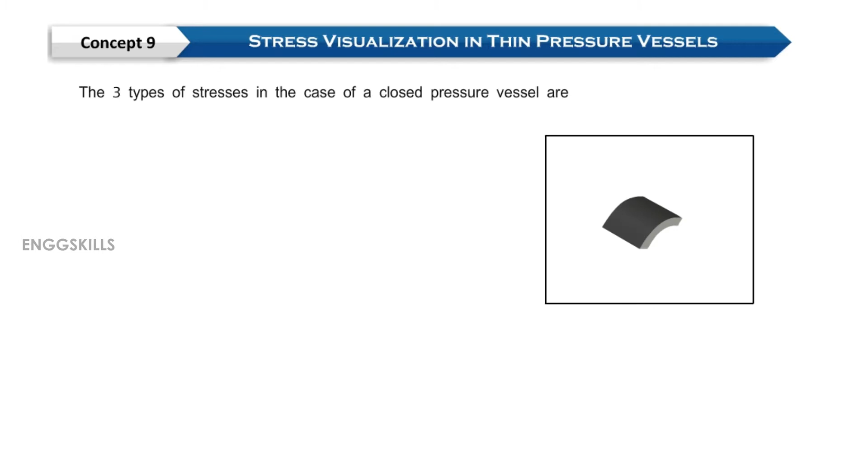The three types of stresses in the case of a closed pressure vessel are longitudinal or axial stress, hoop or tangential or circumferential stress, and radial stress.

Out of these three stresses, for a pressure vessel, radial stress is considered negligible as it is a plane stress condition.

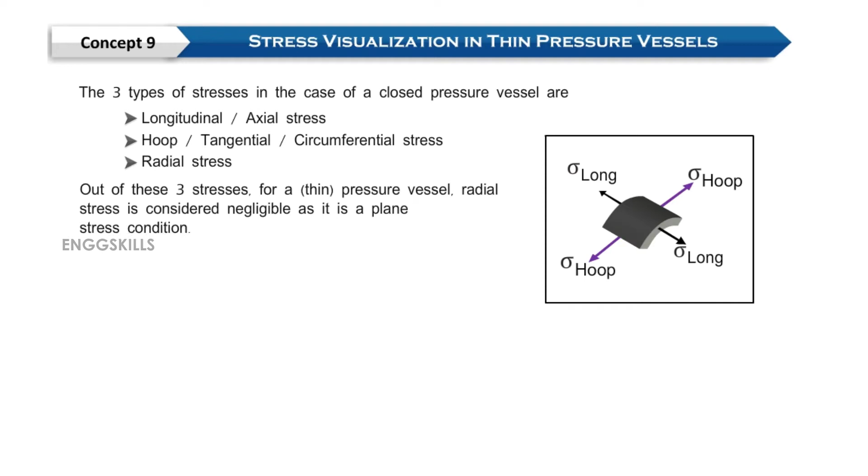Making a general comparison for thin pressure vessels between loads in hoop and longitudinal directions, hoop load is greater than the longitudinal load.

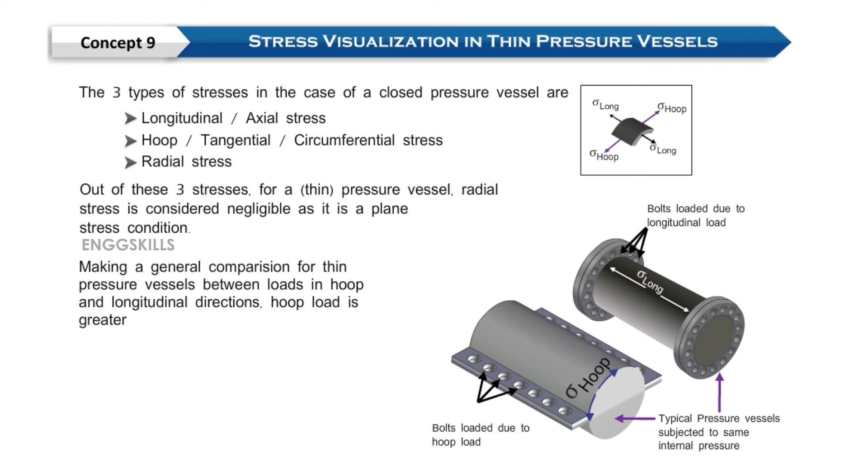Let us now derive an expression for longitudinal stress. We know that stress equals force by area, and force equals pressure into area.

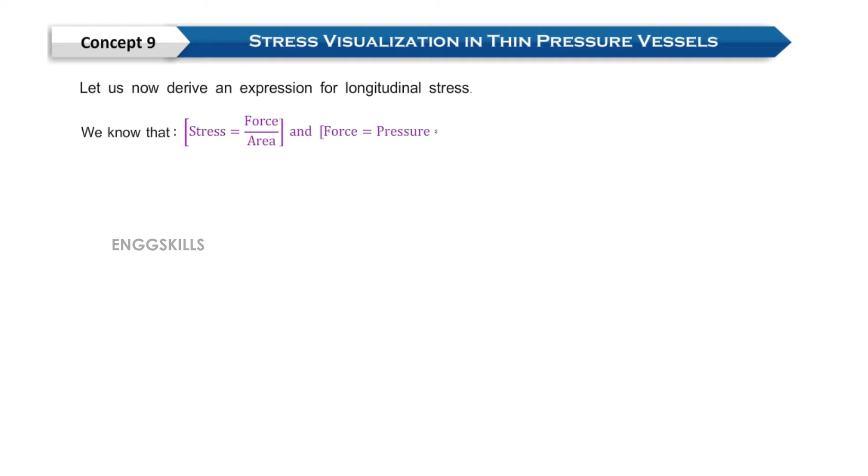The force that causes longitudinal stress is the force that acts on the end lids or plates of a cylinder.

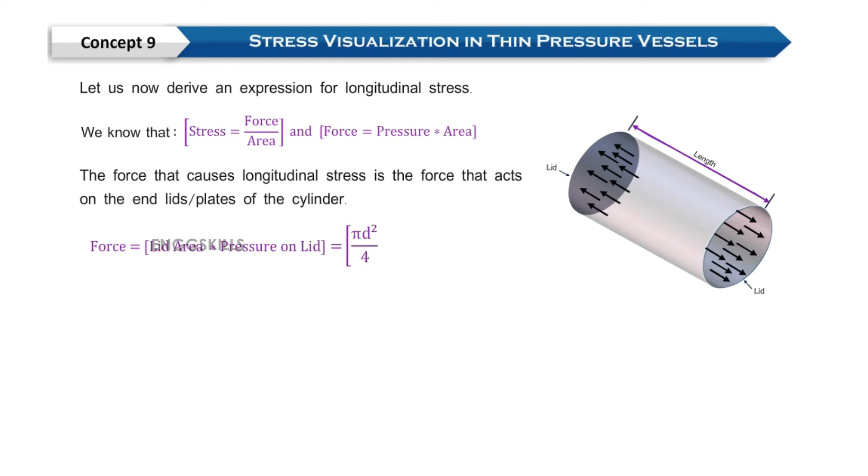Hence, force equals lid area into pressure on the lid, which is pi d square by 4 into P. The figure shows internal pressure in the longitudinal direction.

The material cross-section of the pressure vessel that withstands longitudinal stress is given by pi dt.

Longitudinal stress equals force by area, which equals pi d square by 4 into P, divided by pi dt. This equals Pd by 4t, which is Pr by 2t.

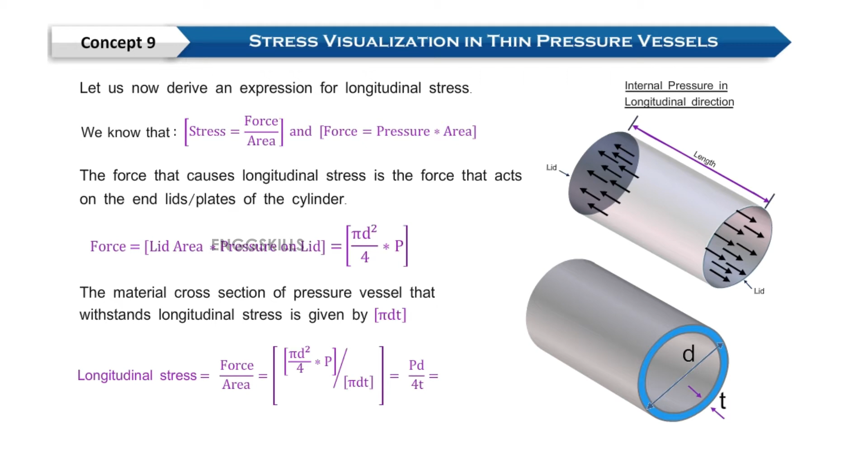Let's now explain hoop stress in detail.

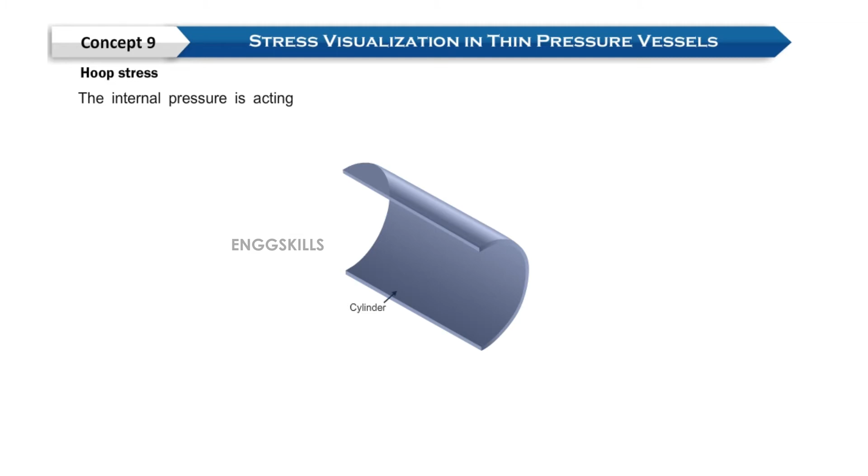The internal pressure is acting on the area across the length of the vessel, pi RL, which is the inner curved area of the cylinder.

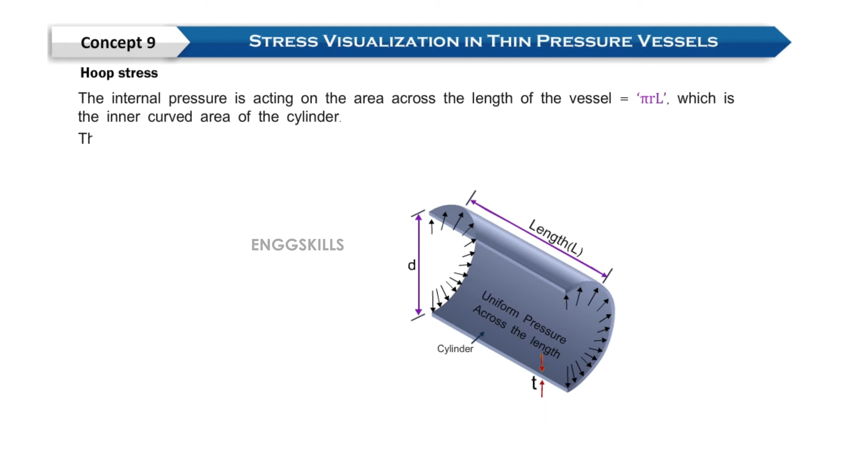The hoop force is computed by computing the projected area for half the cylinder.

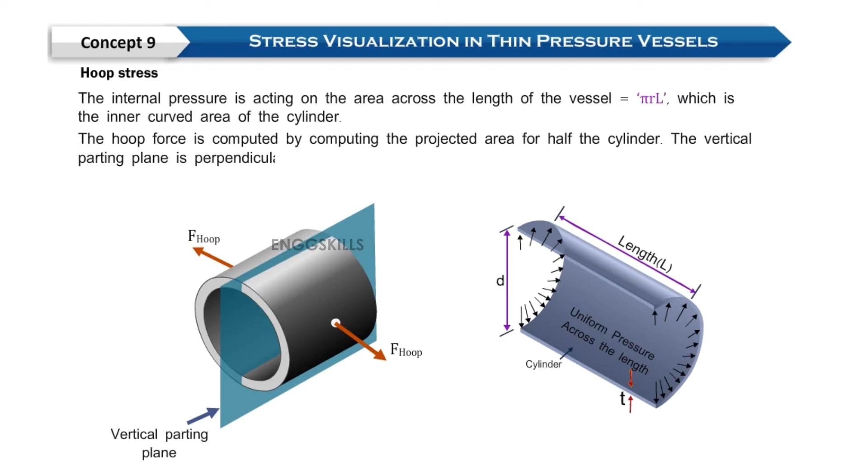The vertical parting plane is perpendicular to the parting hoop forces, and the plane can exist along any diameter as the hoop stress is uniform throughout the material cross-section.

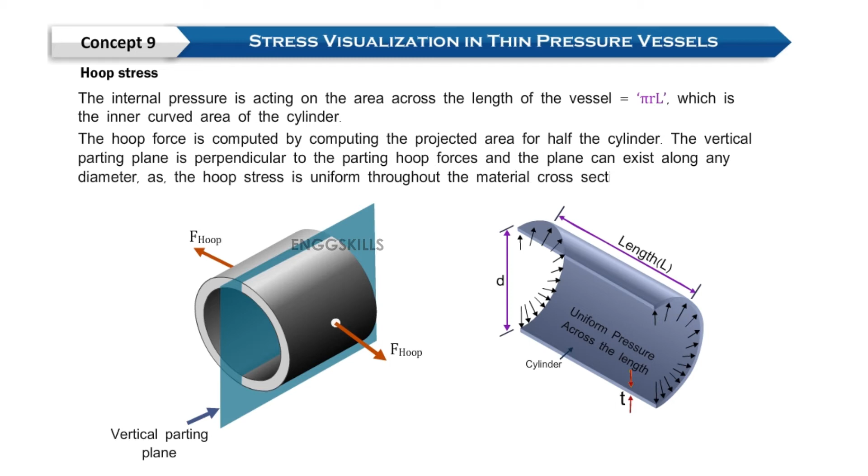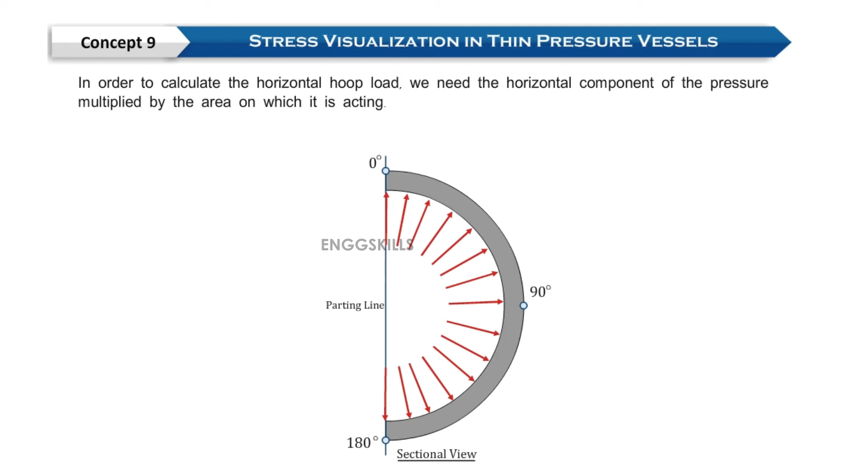In order to calculate the horizontal hoop load, we need the horizontal component of pressure multiplied with the area on which it is acting. Two symmetric arbitrary points A and B are chosen as shown in the figure.

The pressure force F at each point equals P into delta A.

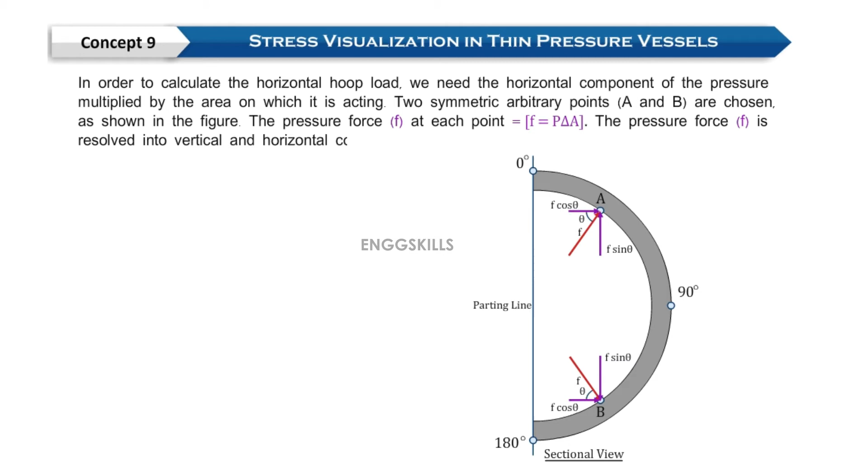The pressure force is resolved into vertical and horizontal components. By symmetry, the vertical components cancel each other, whereas the horizontal components add up.

If you add all the horizontal components across the curved area of the cylinder, we get horizontal hoop force that is trying to part the cylinder along the vertical plane.

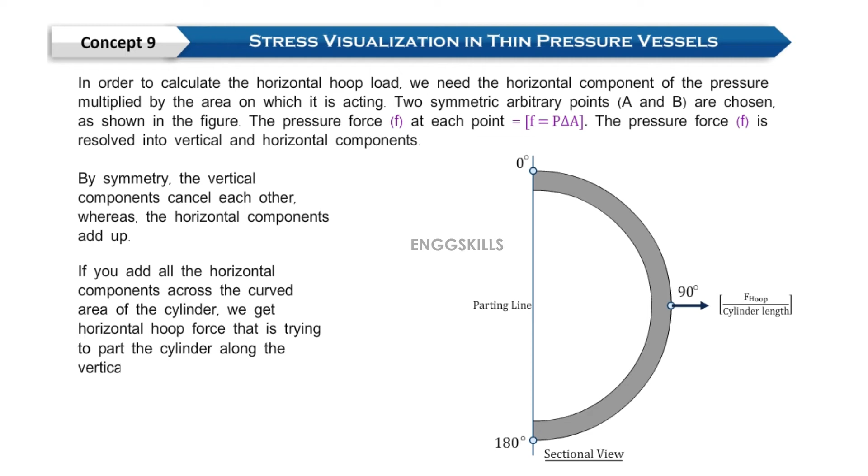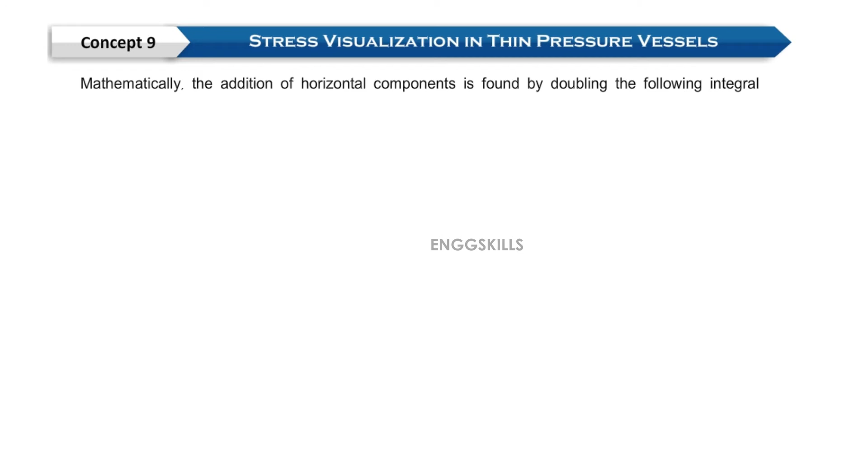Mathematically, the addition of horizontal components is found by doubling the following integral: hoop force equals 2 into F cos theta, integrated between the limits 0 and 90.

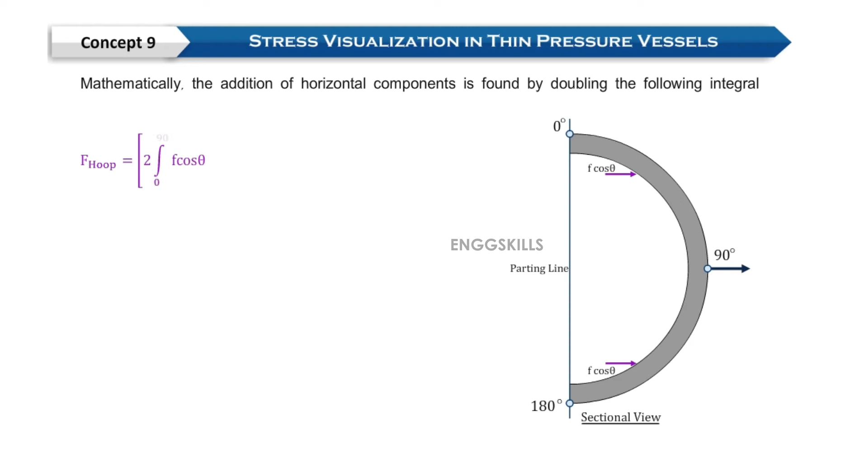Substituting P delta A for F, we get the expression as shown, where delta A equals R d theta into L. Replacing this in the expression, we get hoop force as shown.

Simplifying, we get the following, which equals 2 PRL sin theta between the limits 0 and 90. Substituting the limits and simplifying, we get hoop force to be 2 PRL.

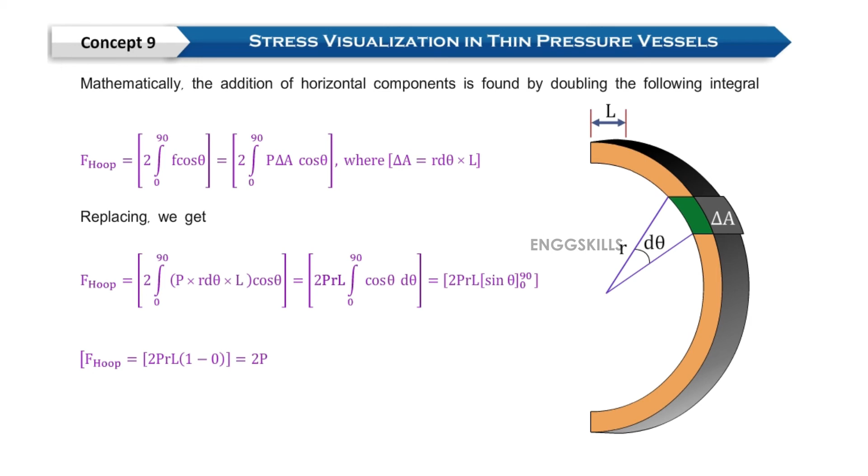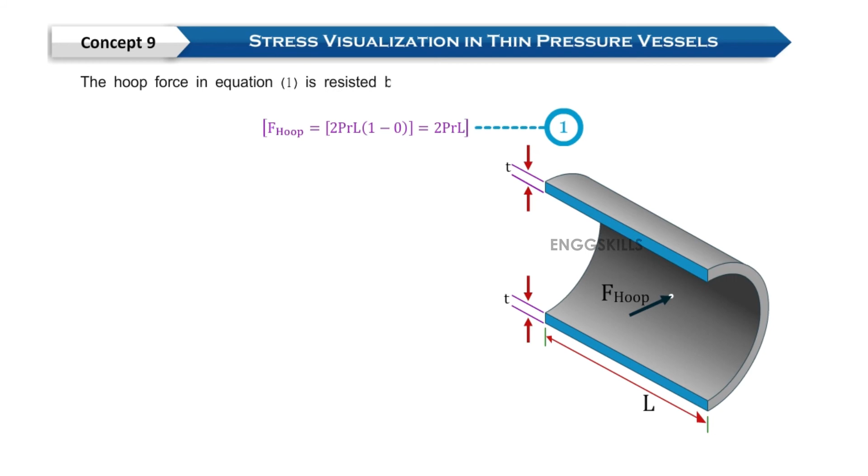Let's number this equation as 1. The hoop force in equation 1 is resisted by the hoop stress acting normal to the areas as shown in the figure.

The hoop stress is therefore given by hoop force by area, which equals 2PRL by 2TL, which equals PR by T.

It can be observed that hoop stress is twice that of longitudinal stress.

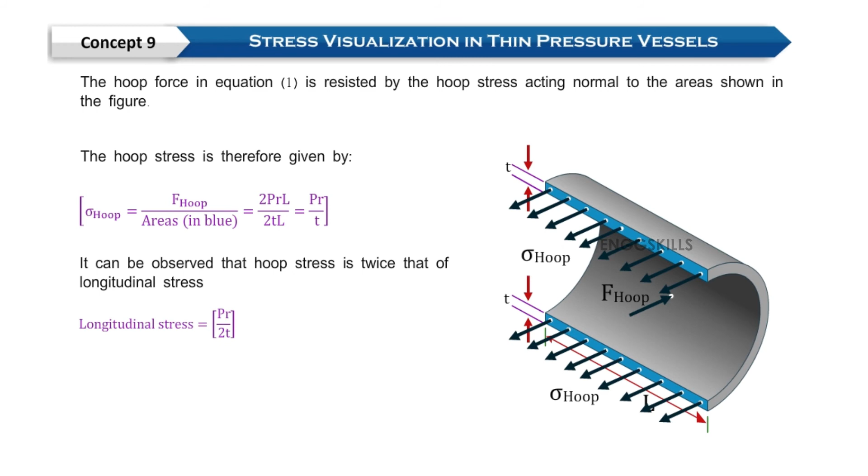Note that hoop strain is not twice that of the longitudinal strain, and hence it cannot be interpreted as we do for stresses.

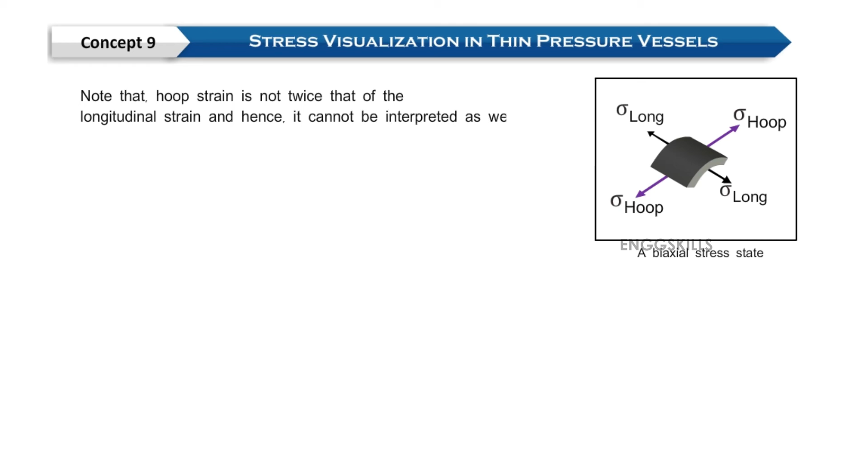This is a biaxial stress state, and hence the Poisson's effect needs to be considered to compute strains.

The actual ratio of strains is as follows: hoop strain is as follows, and longitudinal strain is as follows.

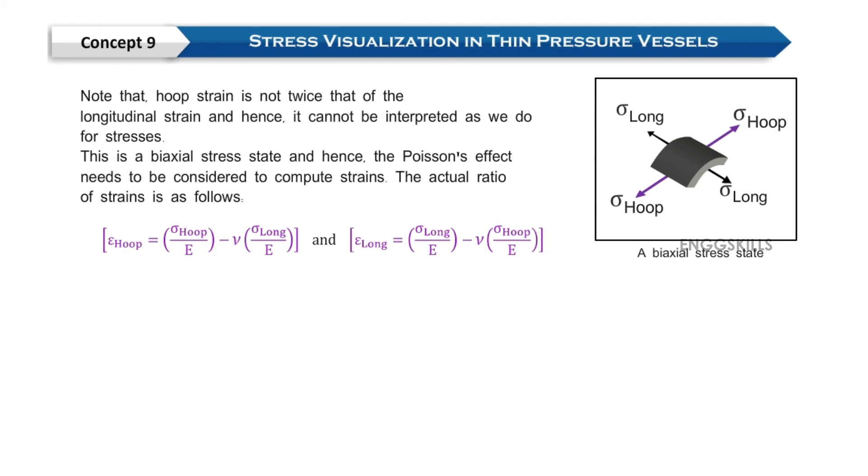Grouping and dividing hoop strain by longitudinal strain, we get the following equation. Taking ratio of hoop and longitudinal strains, we get the following.

Substituting the fact that longitudinal stress is half of hoop stress and hoop stress is twice that of longitudinal stress, we get the following.

Simplifying, we get 2 minus nu by 1 minus 2 nu.

If the Poisson's effect does not exist, then the ratio is 2:1, which turns out to be the same as that of the stress.